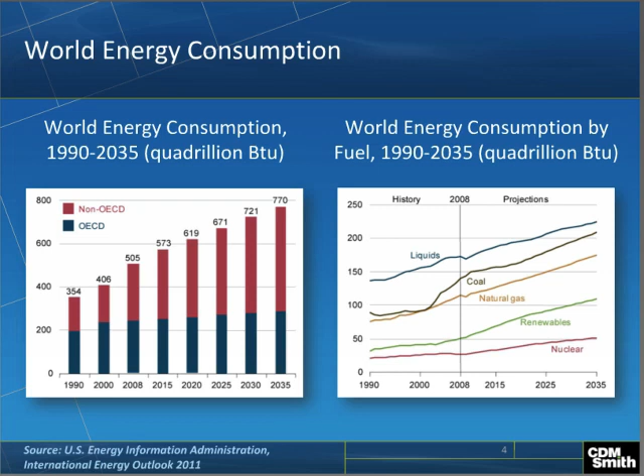What I will speak to today will be focused primarily on the new arena of shale, oil, and gas in this regard. In the United States, we utilize a great amount of energy, as I'm sure you all know.

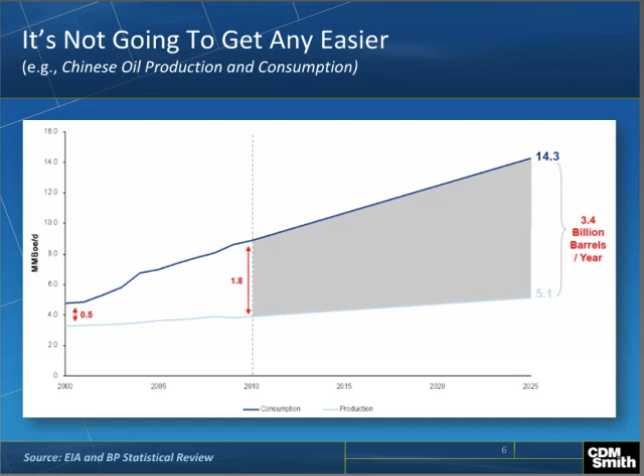And it's not going to get any easier. Here's an example graphic, China. On the right-hand side of this graphic, you see the number 14.3 - that's 14.3 million barrels of oil equivalent expected to be utilized by China in 2025. At the bottom of this graphic, you see that at that same time, they expect to produce about 5 million barrels a day. So that equates to about 3.4 billion barrels a year that China will have to import to meet its demand. And that creates even greater and greater worldwide competition for this precious and limited resource.

Now, we've had a very substantial change in the development of oil and gas here over the last few years, especially since about 2000. Traditionally, over the history of oil and gas production, most oil and gas has been captured from reservoirs underneath fields called traps. So access to oil and gas primarily over the history of production has been oriented towards finding these traps and placing wells within them to recover oil and gas. These are typically very high permeable zones that produce oil and gas fairly readily without any particular manipulation of the formation to make the oil and gas flow.

As we have used more and more oil and gas over the years, we've had to go to deeper and deeper water to find such conditions. We've had to go to far places in the earth, around the world, to find such conditions, and it's getting more and more difficult to access this kind of conventional oil and gas location.

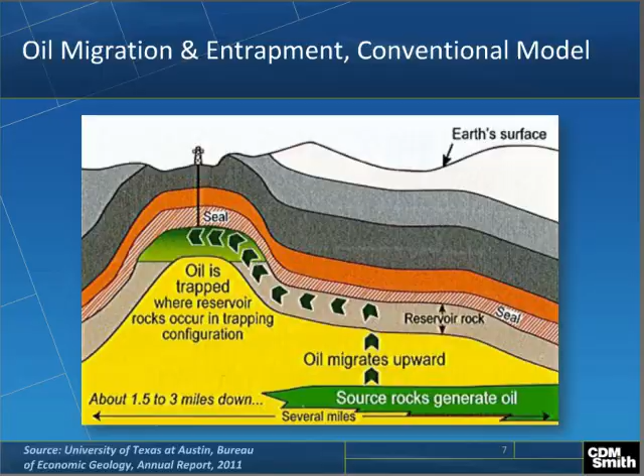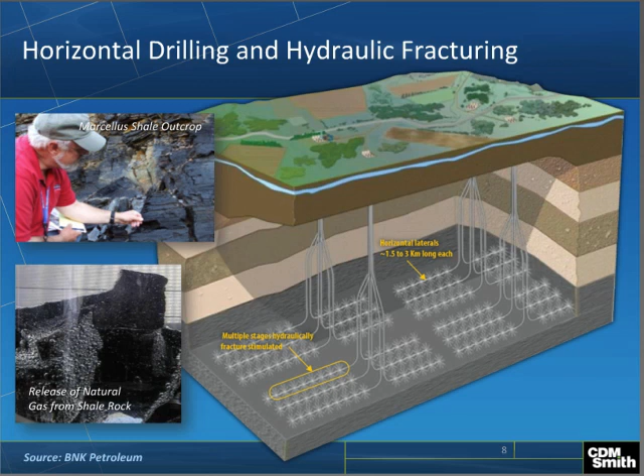Those laterals are hydraulically fractured so that surface area is created for the material to flow to the well. Other things are done too, such as adding sand or other proppants to hold those fractures open so the oil and gas can continue to flow to the well.

Fracturing has been around for a long time. It was initially started way back in the late 1800s using explosive fracturing. The first hydraulic fracturing happened in the late 1940s, and by 1988 it was common practice.

In the late 90s and early 2000s, there began to be a lot of investigation and utilization of the technology in a shale area down in the Fort Worth area in Texas called the Barnett Shale. A company called Mitchell Energy, and Devon Energy, joined forces and really developed the ability to combine horizontal drilling and hydraulic fracturing in a way that made development of gas, in the case of the Barnett, economically successful.

Since about 2006, this technology has really taken off in development of oil and gas from shales and other impermeable formations around the United States, and it's also beginning to be applied in various places around the world. So today, in 2012, 60 to 80% of all oil and gas wells are typically hydraulically fractured, somewhere in the neighborhood of 35,000 per year, and 2.5 million to date, was the last data I've seen. So you can see it's a readily utilized technology.

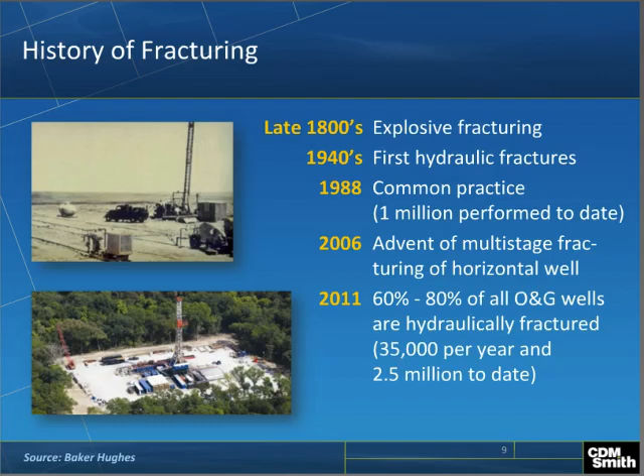The production of natural gas from shale has really taken off since about 2006, when the advent of isolated multi-stage fracture stimulation of horizontal wells was developed, again in the Barnett. Various formations around the United States began to be developed in this fashion.

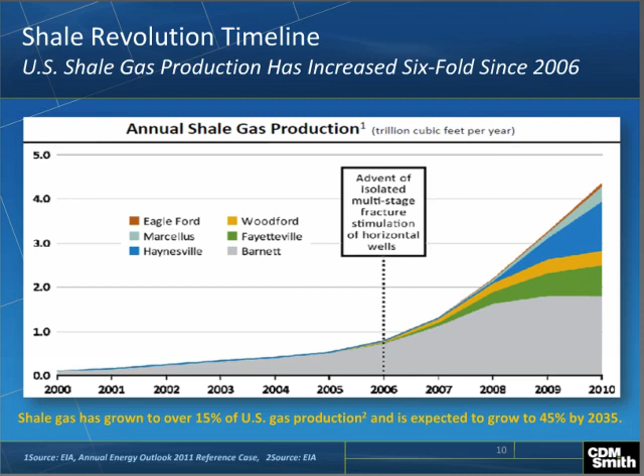You have the Barnett in gray, Fayetteville in green, and various others in different colors. Of particular note is the very major growth of development of natural gas, and of course oil as well, in these shale formations.

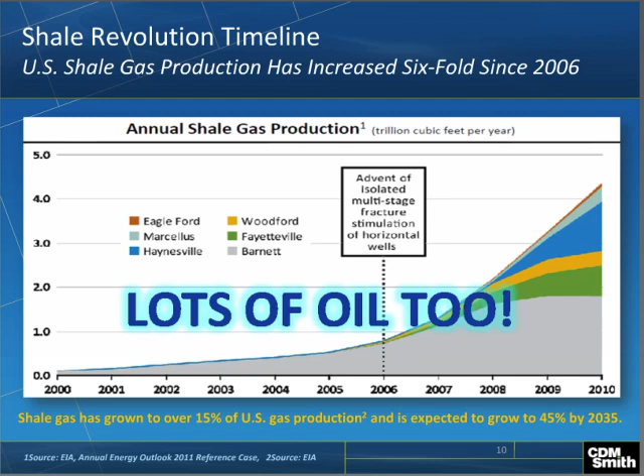There's been a tremendous amount of success, especially recently, in not only getting natural gas to flow to wells using these technologies, but a lot of oil is being developed this way too, in formations that have both gas and oil, and natural gas liquids as well.

There are quite a number of substantial unconventional shale, tight gas, and other basins throughout the United States that are being approached in this fashion.

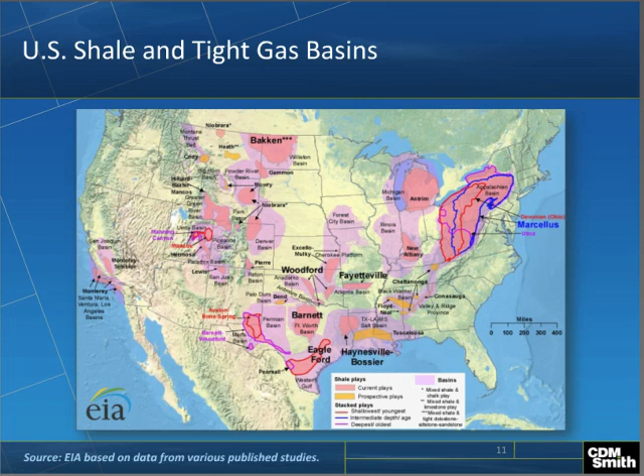Many of you have heard of the Marcellus in the Northeast. We have the Eagle Ford in Texas, and lots of areas in the Rocky Mountain West that contain a tremendous amount of natural gas and oil that is now accessible using this technology.

One of the results of this boom is that geologists are really beginning to understand and spend more time and energy evaluating truly how much of this resource is available to us from these source rocks. There's a process of developing technical reserves, estimating the reserves of oil and gas available that are technically recoverable in various formations. And as more has been learned about these shale formations, the quantity of the estimated technical reserves has really expanded tremendously just in the past few years.

So what we are faced with is the recognition of a tremendous resource available in the United States, throughout North America, and really throughout the globe, previously not available to us, which changes many aspects of energy development. We're in the midst of the very early stages of experiencing, observing, and dealing with those changes.

Currently there are a number of very significant known sources of shale around the world as well, but very little of the world has been studied, so there's much more unknown about this resource globally than is known. I think we can expect a tremendous amount of development around the world.

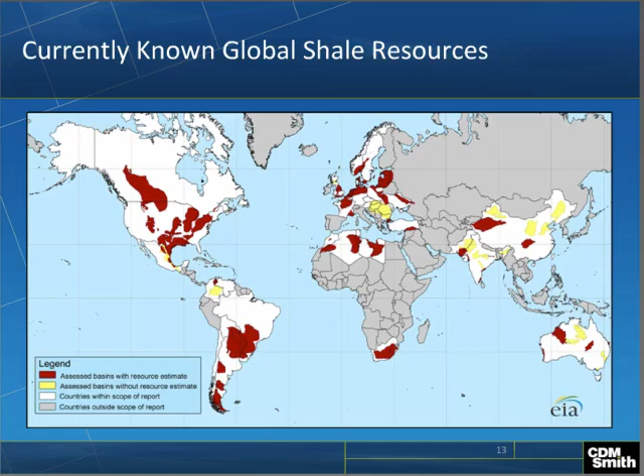So what does a trillion cubic feet of gas mean? Well, 1 trillion cubic feet of gas is enough to heat 15 million homes for a year, generate 100 billion kilowatt hours of electricity, and fuel 12 million natural gas vehicles for 1 year.

The Marcellus alone, which is an area in a portion of the Appalachian Basin in the northeast United States, is estimated to have between 50 and 500 trillion cubic feet available. So you can get a sense of the magnitude of this resource that's available to us. Recent estimates suggest that this represents a 120-year supply for the United States. And as I mentioned previously, there's a whole lot of oil and natural gas liquids being developed as well.

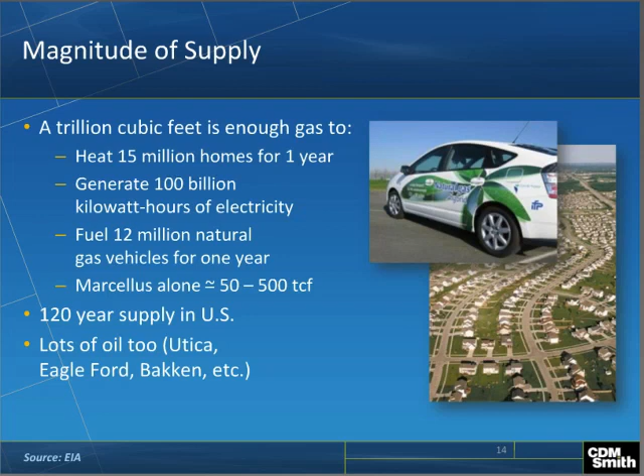Now, this brings some significant economic and geopolitical implications that are very recent and very significant. Many of you may have seen the Time magazine article, 'This Rock Could Power the World.' Interesting article that was presented in Time.

So what are some of the characteristics of natural gas? Now, you'll note that I am focusing more on natural gas than oil and natural gas liquids because of some of the very significant changes that the large quantity of available natural gas now brings to the table for us.

Well, we know we have a lot of it. It used to be considered an unreliable source, and so you didn't see much use of it in power production. In fact, there was fear of using it for power for many years because it was needed for residential heating, et cetera, and there was intent to protect residences from having to compete for natural gas with power companies.

Well, that's changed considerably. It is the cleanest combustion fuel available. It produces about half the CO2 of coal, but it does have to be managed, especially fugitive losses, because methane released directly to the atmosphere is considerably more potent than CO2 from a greenhouse gas standpoint.

It is considered a very important bridge fuel for eventual long-term transition to renewables. And it's also a very valuable leveling fuel for renewables. For example, with wind, you can't get wind power when the wind is not blowing, and with solar, you need the sun to shine to collect solar power. So during those periods when wind, solar, and other renewables are not meeting demand, natural gas is a very effective leveling fuel for that purpose.

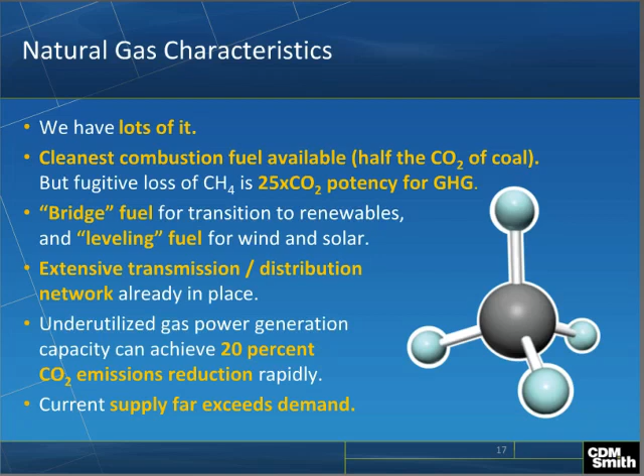A very significant point also: current supply far exceeds demand. Now that we have access to all of this gas, we have more of it than we have infrastructure that can readily utilize it in the immediate term.

Many people are recognizing the importance of it, not only oil and gas companies and many in the public, but politicians as well. For example, the White House has recognized the great value that this resource brings to our society.

The White House published a 3-point plan: developing and securing America's energy supplies, energy reduction, and innovating clean energy being key points within that plan. And there's a recognition that natural gas and oil from shale formations will play a critical role in domestic energy production in the coming decades.

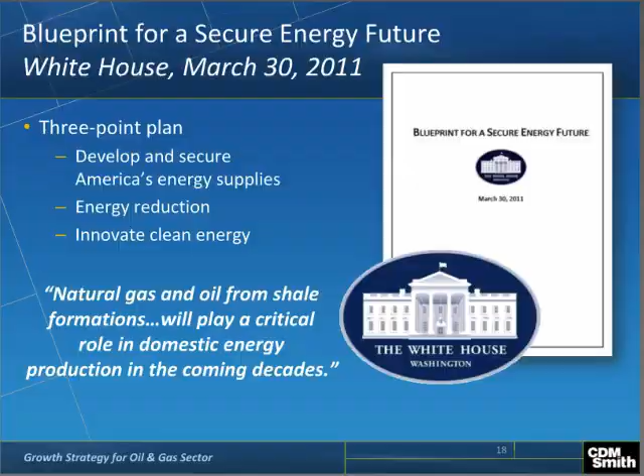Let's look at supply and demand and the meaning of this just in terms of price. A barrel of oil is north of $90 a barrel, and about a million BTU of gas is around $2.50. And these numbers, of course, change over time, but that's generally accurate today.

And 1 barrel of oil equivalent of natural gas is about 5.8 million BTU. So the price of 1 barrel of oil equivalent of natural gas is about $14.85, using these assumptions on the price of a barrel of oil and a million BTU of gas. So compare $97 to $14.85 for the same amount of energy. And what that translates to is a major economic driver for expansion of utilization of this large natural gas resource that we now have available.

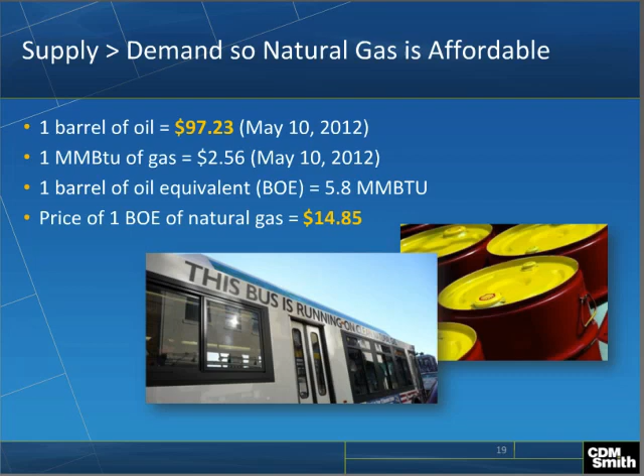And what you can expect to see is much more orientation towards natural gas-powered transportation sources and much more orientation towards natural gas power generation.

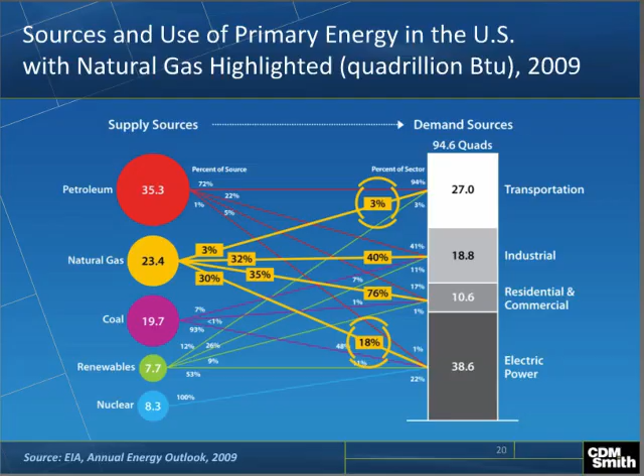And there are very substantial economic implications to this new find as well. Let's start with the U.S. reliance on foreign oil and gas, which equates to about $500 billion in wealth transfer annually. Big number, very significant if we could keep that number here in the United States.

The Barnett Shale alone, this area near Fort Worth, Texas that I mentioned, which was the first significant shale area, it's estimated that $11 billion and 111,000 jobs were annually contributed to the Dallas-Fort Worth area, plus about $275 million annually in state severance taxes. The Wall Street Journal, probably about a year ago, suggested that there had been over 600,000 jobs created to date in the shale gas arena alone.

And the U.S. chemical industry is getting a rebound from this event as well because of the source materials that shale development provides for chemical production. So it's anticipated there'll be $132 billion of U.S. economic output over a period of about 10 years, and 400,000 jobs in the chemical sector. So these are just some examples of the significance of this finding with respect to the economic influences that it can have here in the United States.

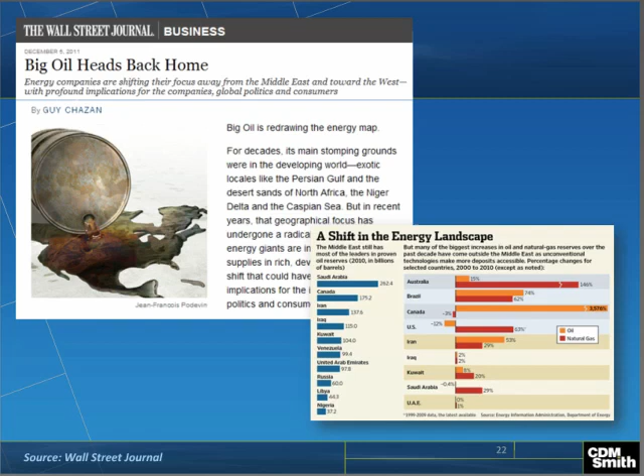And geopolitically, you also see that big oil is really focused in new areas. Previously forced to be in places that may be very dangerous and risky to develop, now they have the opportunity to focus much of their energy in development in areas that are safer and easier to address. So a big shift in oil and gas companies' orientation towards the United States, North America, and more stable parts of the world.

Well, there are environmental concerns related to any and all oil and gas development, and the new hydraulic fracturing and horizontal drilling is no different. It has environmental concerns that must be managed. And these concerns can be categorized really into two categories, surface and subsurface. From a surface standpoint, air emissions, water resources and quality, land impacts, drilling locations, infrastructure, truck traffic, lots of truck traffic, things of this nature.

From a subsurface standpoint, protecting underground water resources is a very important matter, and some implication of seismic events that can be triggered with respect to disposal activities of liquids underground. And this is an area that's receiving some interest. I encourage anyone who wants to look at that any further to access the USGS, the United States Geological Survey. They're engaged in studying this. In fact, there is a presentation available on the Academy's website by Dr. William Ellsworth, who gave a presentation at an Academy function several months ago on seismic events.

And in essence, the USGS represents that there may be some relationship to some degree, although that risk appears to be very low and manageable. But I think it's an interesting area of concern, and people should continue to study it and understand it.

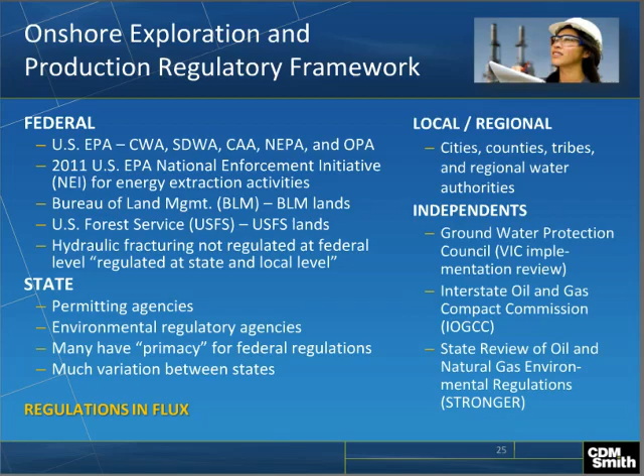And because of this very rapid change and development in this arena, there is a lot of interest and a lot of focus in the regulatory arena. And there's quite a bit of development. There's a lot of flux occurring in the regulatory arena, and a number of very significant studies going on, such as EPA's hydraulic fracturing study, which is in progress right now.

Now, one of the significant aspects of hydraulic fracturing, of course, is water use and the potential environmental impacts that might bring. Frack water utilized is typically somewhere between 2 and 6 million gallons per well. There are additional components that are added to the water to make the fracture behave the way that the operator needs it to behave. And then there's what's called flowback. When a well has been fractured, much of the water that was pumped down to do the fracturing is returned and pumped out of the well, and that has to be handled as well.

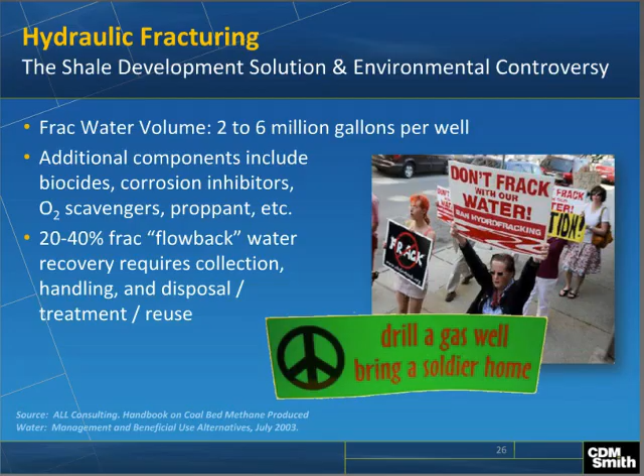The water is a very, very significant aspect of successful development of unconventional oil and gas. One has to find it, transport it, store it, treat it, lots of reuse, there's disposal required of it, much effort required for protection of it, and that's both surface and groundwater.

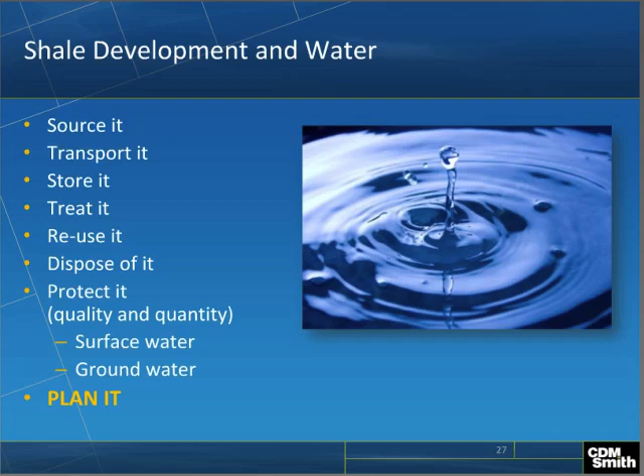And all of this means that there needs to be very effective and thoughtful planning around the water cycle in oil and gas development, especially in the unconventional shale arena. And that planning really exists for both oil and gas companies, regulators, and the public that is in the location where much of this development is occurring.

Now, we should understand the implications of shale in terms of water use and how that compares with other major water uses. And in reality, even in areas that are receiving a great deal of development, the overall usage of water is relatively low compared to other major uses such as mining, public water systems, other industrial and power generation.

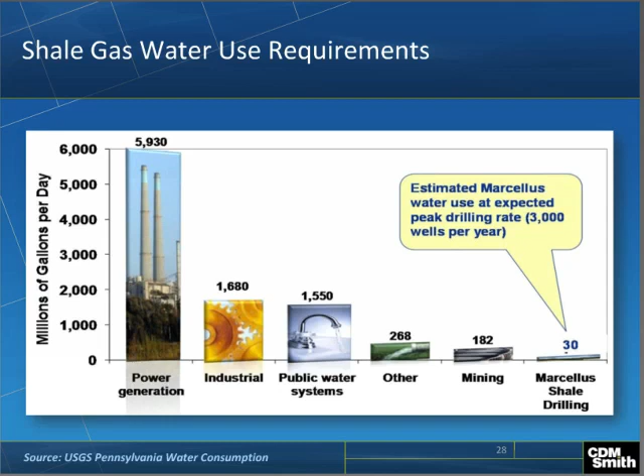But it still creates an added stress, and in some areas, for example, drought-stricken zones like South Texas, or other areas that are in highly sensitive environmental conditions with the ecology and public protection concerns, it's still a meaningful use of water that needs to be managed, but it needs to be managed with the proper context of quantity.

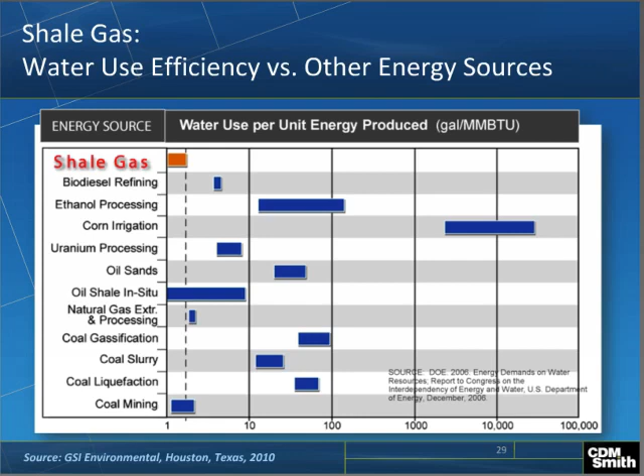And it also needs to be understood from the standpoint of, well, how much water does it take to produce shale oil and gas versus other forms of energy production. And in reality, it's a relatively small water footprint compared to many other sources of energy production. And that should be understood as well.

So for protection of water quality, there really are three primary areas of concern and attention. Number one is surface activity. You have spills, you can have dikes that breach, and all of these things require ongoing attention. And a lot of attention is being given to the management of surface activities for that reason.

You have folks that are concerned about release of fracturing fluid to drinking water aquifers. Most people in the know who really understand the technology consider it a minimal or even non-existent risk. We'll have some other speakers today that can speak to this in a little bit more detail about why that is. But it's still a concern that the public has quite a bit of focus on, and EPA's hydraulic fracturing study is, of course, spending a good bit of time on that matter as well. But it's important to separate the science from the fear in that regard. And there's a lot of attention and emphasis on that matter.

And then, of course, there's well completion. A well has to be properly completed to protect various zones, drinking water zones being one. And the next speaker will spend considerable time on that matter.

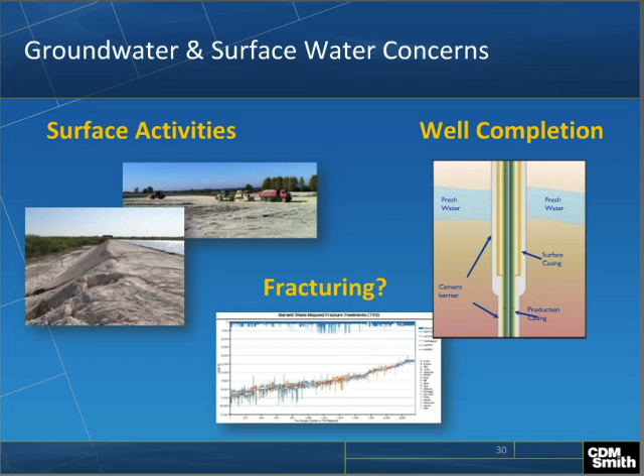Now let's just talk about energy choices overall. The sources of the world's energy are basically distributed in the following way. Oil is over 33%, coal is at almost 27%, natural gas at about 21%, renewables a little over 10%, et cetera, nuclear and others included.

There's a nice quote by Klaus Lackner. There are very few energy resources large enough to cope with modern global energy demand. Any technology able to satisfy these demands will unavoidably interfere with natural dynamic systems, which must be mitigated. A scenario in which available energy resources fail to provide a basis for the energy infrastructure will be a scenario with drastic reductions in economic output and one in which living standards will fall back to much lower levels.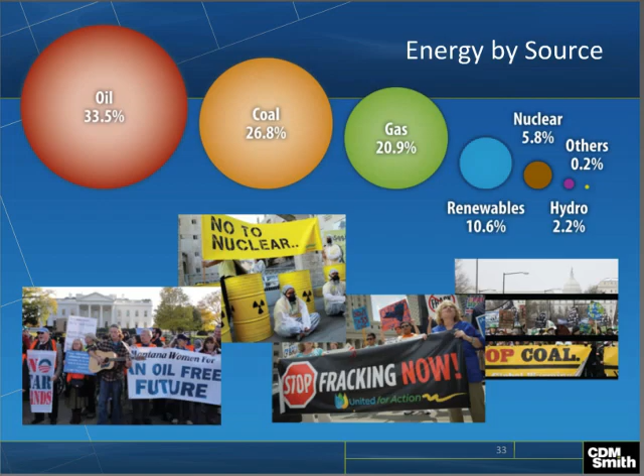And so from my perspective as an environmental engineer, what we're faced with is the need to accomplish environmentally sound shale development. And there are lots of influencing factors to doing this, but primarily four in my mind. There's the oil and gas companies who have the expertise to acquire access to oil and gas, but limited water expertise.

We have the community that needs the energy. We need the jobs. We have environmental concerns that need to be addressed. And generally speaking, the community doesn't have the technical expertise to really understand a great amount of the details that are important.

We have the engineering and science community, which we may not be oil and gas developers, but we know a lot about water management. We know a lot about environmental management. So we're bringing our skills to the table to help accomplish this.

And then you have the regulators. Regulators faced with a huge increase in demand as a result of this development activity, having to respond to that. They have responsibility to respond to that. It's a new challenge, and they have stretched resources. So all of these factors come together and represent the challenge that we have as a society, and that is to access our energy resources and do so in an environmentally sound way.

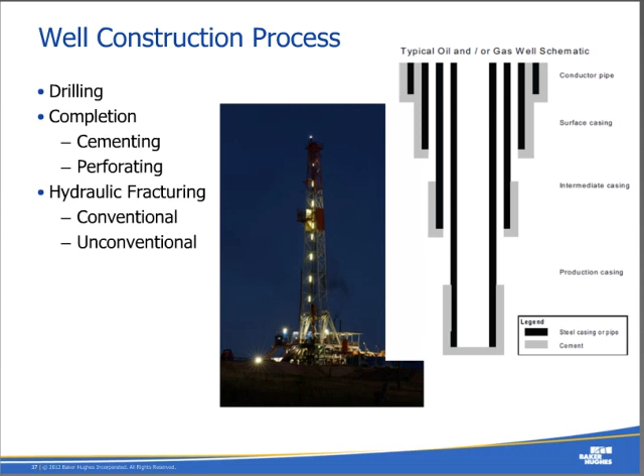So what I'll talk to you about today is the drilling process, the completion process, including how we cement a well, and also how we perforate a well so that we can allow the hydrocarbons to flow. And then I'll go through the hydraulic fracturing process in conventional wells that have been around, as Hunter mentioned, since the 1940s and a very well-established practice since the 50s at least, and touch on horizontal drilling, which is one of the enabling technologies that has allowed shale to really come into play, and tell you really what the differences are between conventional and unconventional.

If we move on into the drilling process, there are wells drilled in the United States today that go up to 35,000 feet in depth, and that's just straight vertical depth. When you look at the typical wells that we do in shale reservoirs, oftentimes they can be 10,000 feet deep, but they can also have a lateral horizontal section that's 10,000 feet out. So when you're trying to reach that from surface, you're actually going 20,000 feet, although it's 10,000 down and 10,000 out.

There were almost 65,000 new wells drilled in the U.S. in 2011, and that was done with basically 1,900 rigs. If you do a little math on that, you see that a typical well, an average well in U.S. land, takes anywhere between a week and a half to 2 weeks to drill. It's a relatively quick process, actually, when you consider the depths we're going. The U.S.-based rig count right now for this past month in August was 1,914 active rigs working.

And if you look at the breakdown, we had roughly 25% of those drilling directly for gas reservoirs and 75% drilling for oil reservoirs. And the reason why I mention that, if you look back at statistics from a year ago, those numbers were basically the opposite. Everybody was drilling for gas. But because we have had significant success in bringing gas to market in the United States, the price of gas has fallen drastically. And Hunter touched on those numbers and the differences between the price of a barrel of oil and the price of a barrel of oil equivalent of gas. And basically, right now, the driver for most companies is to try and produce oil as it is more lucrative.

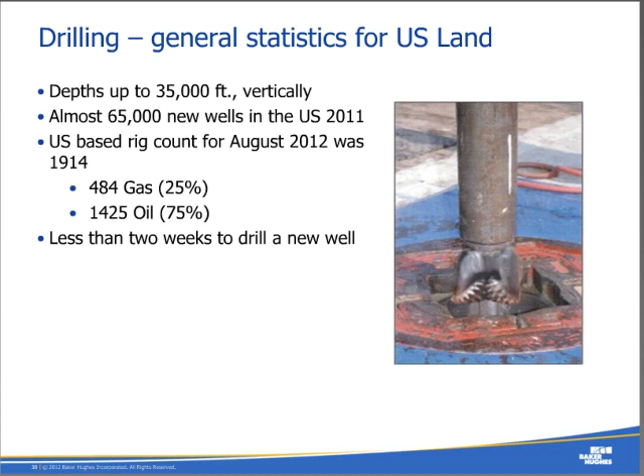Most of the companies we speak about are not privately held, and they're not done just for the greater gain of the world, but for absolute profit. So oil is more profitable to go for at the moment, and you see that very quickly in the numbers.

If we move to the next slide, we'll see how we actually get to the oil and gas. What does the drilling process look like? I point out the rig here is the small thing at the top. We have a drilling rig, which actually, much like an electric power drill in your house, provides rotational torque and actually drills a hole.

It controls the downward force of the bit. When we're talking about getting to these depths, the rig controls the weight of the full string that goes into the hole. When you're talking about vertical drilling, it actually provides the rotational torque necessary to turn a full drill string and do the drilling process.

It actually cuts into the rock, into the ground in the formation that's there, and delivers that back to surface. And when I say deliver that back to surface, obviously when you make a hole in the ground, you create cuttings that have to be removed from the hole. That's done by a process of circulating drilling mud, which is a fluid we'll talk about in detail in a few minutes.

So when we get to the point of talking about horizontal drilling, there are several techniques that have come into play that really have enabled us to exercise our ability to get at these shale wells. One of those is measurement while drilling.

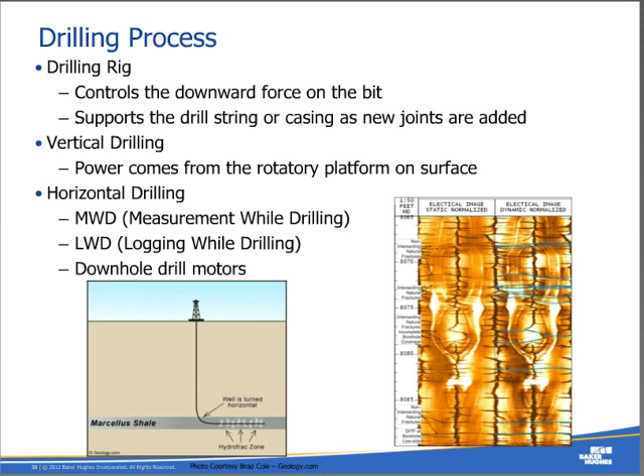So it's quite an enabling technology to make sure that we're producing the right thing.

I previously mentioned muds, drilling fluids. Basically, these are circulated down the drill stem and back up the outside, the annulus. They create a jet down at the bit that helps cut into the formation, remove the cuttings from the ground you've dug up, and also lubricate the bit and control the stability of the borehole.

If you think about it, if you just go out in your backyard and start digging a hole, you can only get so deep before it starts to cave in on you. One of the major functions of drilling fluid is to create a hydrostatic head and pressure that enables you to have some borehole stability.

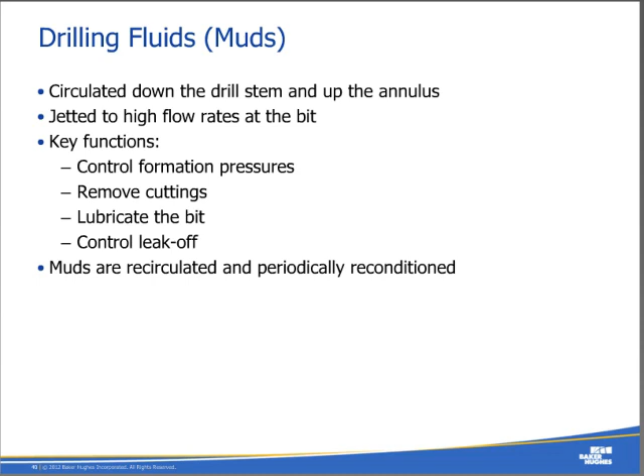These muds are recirculated and used over and over again, so it's not like they flow out of the well and are disposed of. They're actually created with barite and some other natural chemicals in most scenarios, and they're used over and over again.

We also go into a lengthy discussion of cementing, and Hunter touched on the fact that surface and groundwater are some of the areas where we absolutely must make sure we're protecting the environment. Cement is one of the main low-tech tools we use to do that, and it provides a permanent bond between the casing that we put in the ground and the formation.

We'll talk about that on the next slide. I'll show you some pictures of exactly what I mean between casing and formation. And it provides some stability and isolates between the zones.

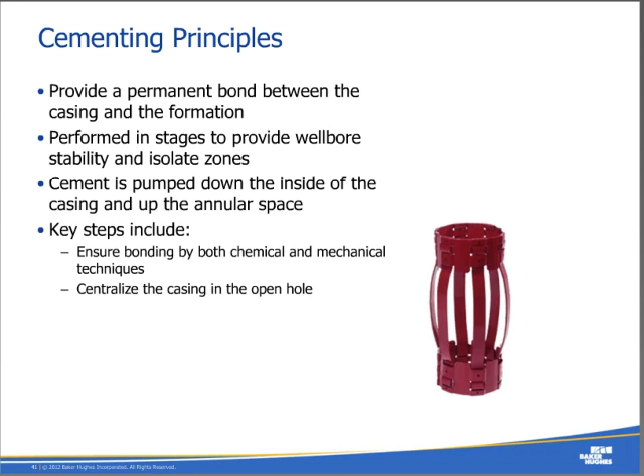Cement is actually pumped directly from the surface. It goes down the inside of the pipe and back up the outside, so you get it into position where it can isolate the actual formations from the surface.

If we look next, there are quite a few tools that we use. This stuff is not just Sakrete. It's not the kind of stuff you would go down to Home Depot and buy and mix up and pump down an oil well.

It's very well engineered. There are a lot of quality controls that are done prior to placing the cement, during the placement process, as well as after placement, to ensure that we're actually creating the right type of integrity that we expect.

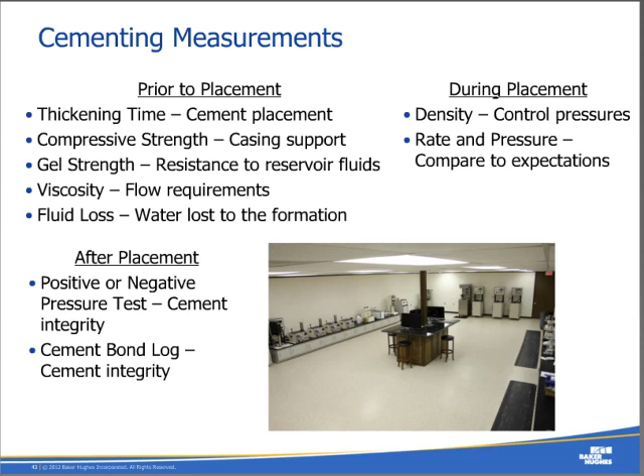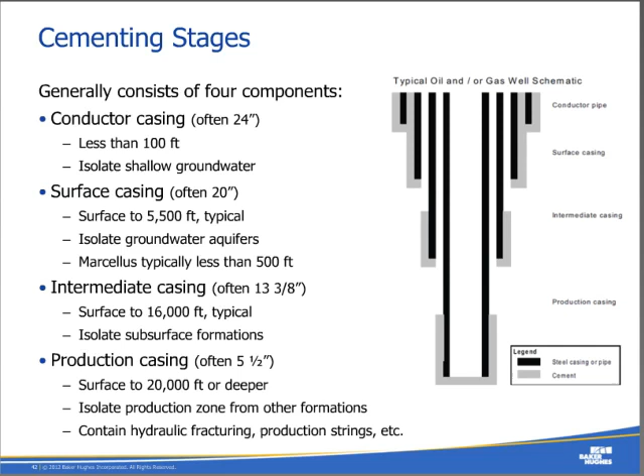Now, if we return to the next scenario: we've put this string of metal pipe into the ground, gotten it to our hydrocarbon producing zone, and fully cemented it in place so it's completely sealed and nothing can get in or out. Now we want to turn it into something that can produce oil and gas. The way we do that is we actually have to poke holes in this perfectly pristine environment we've just created, and we do that in a couple of different ways.

One way is explosive perforating. We run in a charge of shaped charges, like you'd see in demolition for buildings or other deconstruction projects, but specifically tailored to this industry. This blows holes directly through the pipe, and once that's in place, it allows the hydrocarbons to flow in.

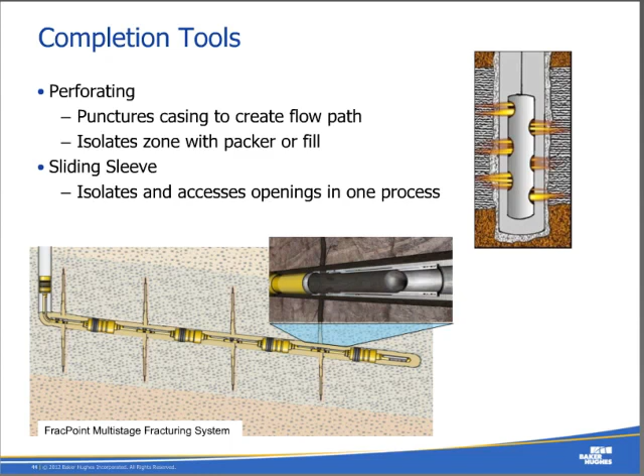Another approach is the use of multi-stage fracturing systems, where we put in a set of sleeves that already have ports in them before they're installed, so you don't have to blow a hole in your perfectly pristine pipe. That's the completion tool scenario.

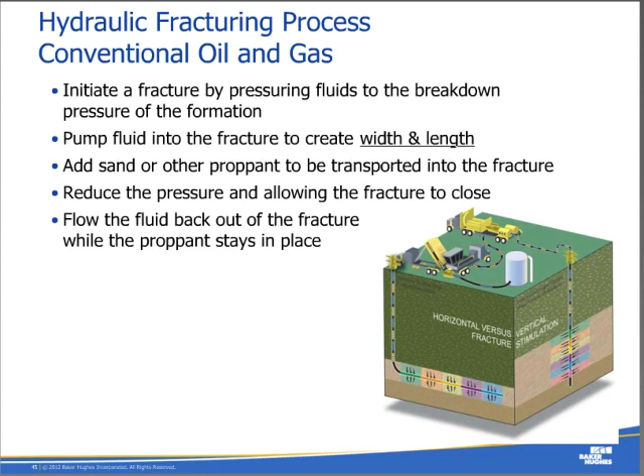Once the completion is in place, we need to get to the point of hydraulically fracturing. In conventional oil and gas wells, this was done not so much to force a well to produce, but to create a better producing well than one that wasn't fractured. So you're basically pumping fluid into the wellbore to create cracks, and the more you pump, the greater the width or length of the crack created. Then you pump sand along with the fluid so the crack stays held open while production takes place. A lot of the fluid flows back out of that fracture once it's in place, so you need a very engineered fluid to make all of this happen.

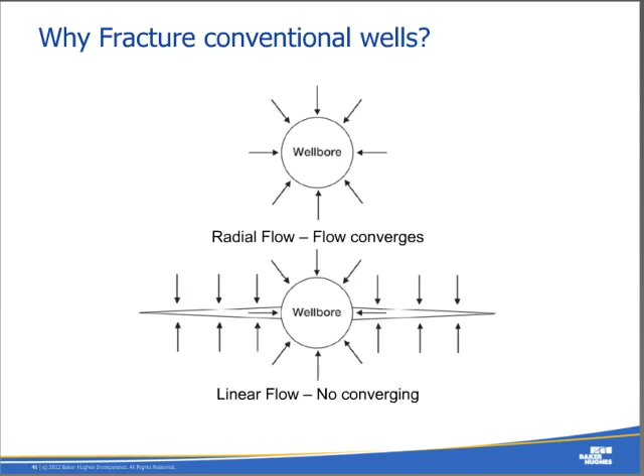When we talk about why we actually fracture conventional wells, think about a wellbore with radial flow — all the flow converges, and it's very difficult to produce because of that converging effect, which chokes back the flow. When you fracture a well, it creates a linear flow path, so there's no convergence.

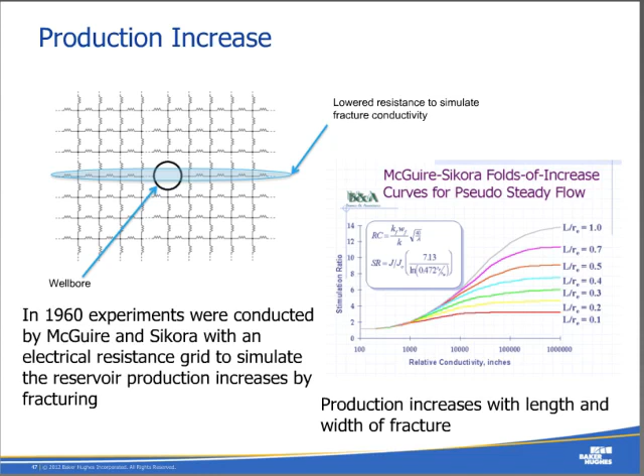Back in the 60s, there were some interesting experiments done to try and quantify what fracturing a well actually means. McGuire and Sikora did simulations with electrical resistance that showed the further out you go with a fracture to lower the resistance, the more production you'll get over time. So the length and width of the fracture were the key factors — the saving graces, really — in how you increase production from a well.

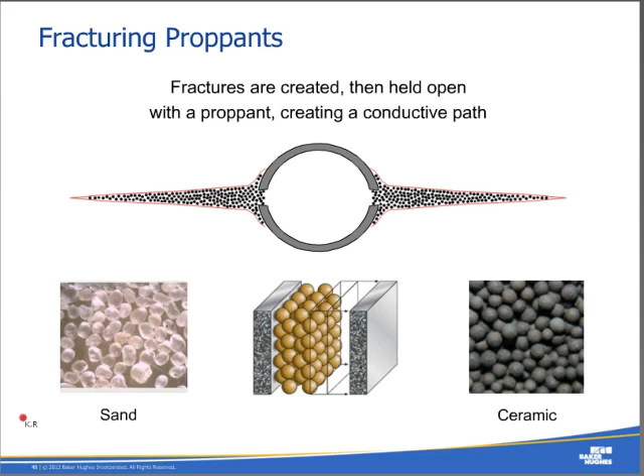I mentioned proppants before — this is basically sand in most cases, but it can also be ceramic beads. Their function is this: we create a fracture with a certain width, but as soon as we release the pressure, the fracture tries to close back on itself and seal off. So we put sand in place to enable the oil and gas to flow back out of the fracture. That's the basics. From a fracture mechanics standpoint, the first thing you do in fracturing a well is pressure up to the point where you exceed the breakdown pressure and start to create a crack.

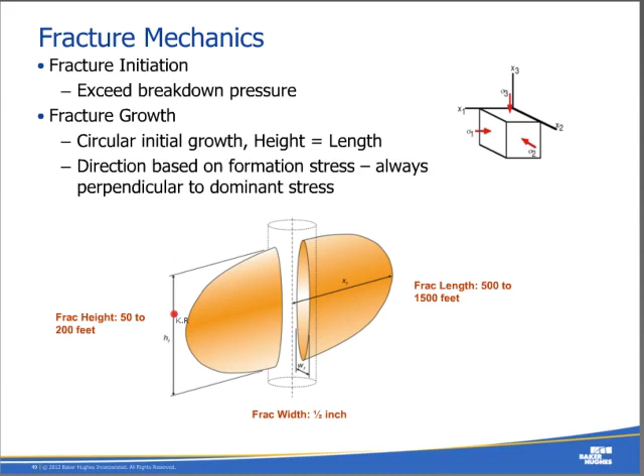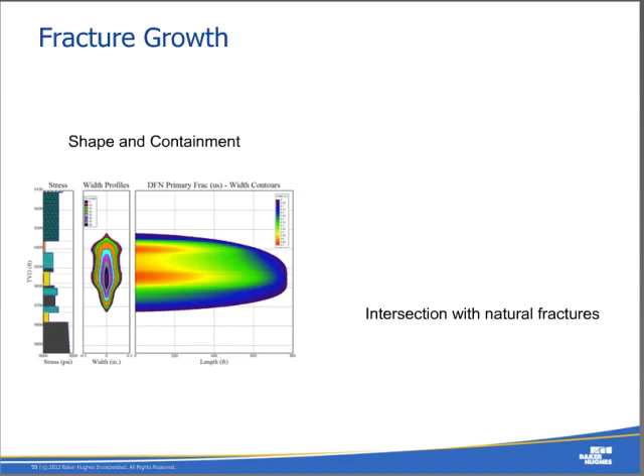If you look at fracture growth, we can fairly well tell what the shape of a fracture will look like before we ever make it. I mentioned the logging while drilling tools that give us data from the well. One of the things it gives us is this stress environment. So we know, as Hunter mentioned, that this zone is seal rock. When we create a fracture here, it'll only grow to a certain height before it runs into a higher stress zone of rock, and the easiest way for it to grow is out instead of up. This is something we use to predict where the fractures go.

I mentioned before that the fluid properties in hydraulic fracturing are used to create low pump friction, so you don't need as much hydraulic horsepower at surface. We need to create fracture width with low to high viscosity fluids and transport the proppant into place. But after the proppant is in place, we need a fluid that returns to more or less water consistency, so that it doesn't wash the proppant back out of the well.

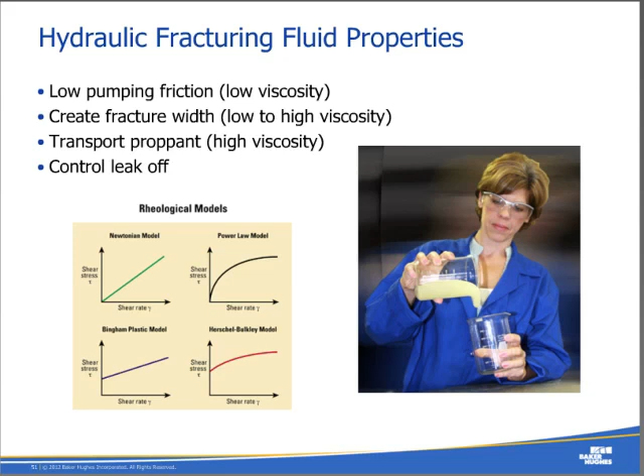We've talked mostly about conventional wells now, and I'll move into unconventional as I get to my closing. Unconventional is where we deem shale and tight gas. In conventional wells, you can think of the formation as basically a sandstone—like a sandstone coaster—where the permeability and porosity are such that it soaks up water easily, and lets go of fluid pretty easily too. In conventional wells, we fracture simply to increase production; it's just a stimulation technique, not a requirement.

In tight gas wells, the formation is almost like brick or concrete—there's not a whole lot of fluid flowing in or out; it's very difficult to flow. The unconventional is closer to granite and shale, and you absolutely have to have fracturing for it to flow at all. As Hunter mentioned, this is the source rock, and it just doesn't contain the type of volume, porosity, or permeability that allows the hydrocarbons to flow.

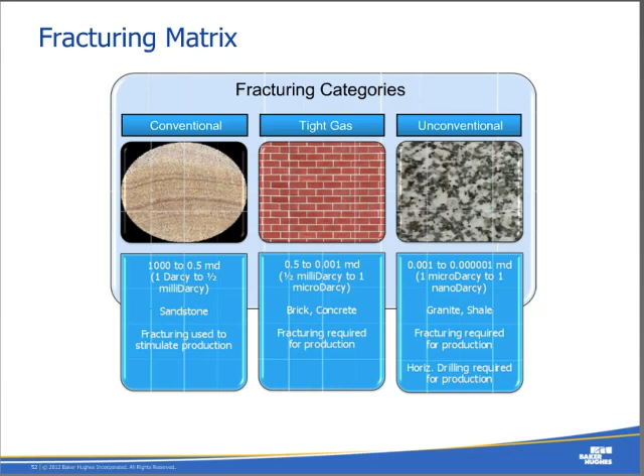If you look at shale, what is it? Hunter showed an outcropping as well. It's mudstone, siltstone, shalestone—the source rock—with very fine grain size and extremely low permeability. The natural gas and oil actually sit within the natural fractures in the shale, and it's adsorbed on the surface. It's not like a big pool you can just tap into.

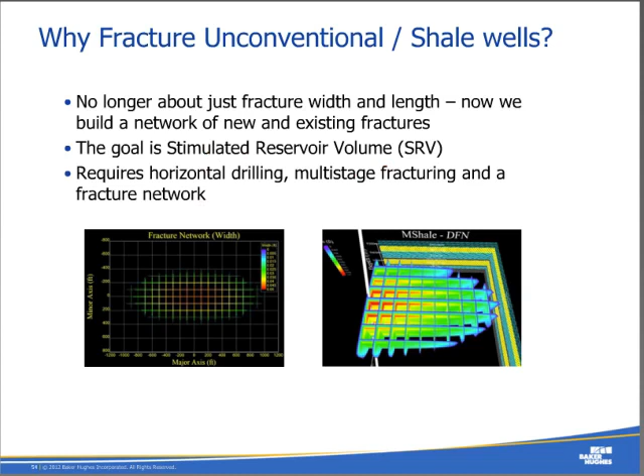So that changes the whole method we talked about of just creating a bigger crack. What you actually have to create in unconventional wells is a fracture network, and that's why you get multiple wells and multiple stages. As you can see here, these are some visualizations to show what we're trying to create downhole to get stimulated reservoir volume. As we get further into this, operators are upping their number of stages, upping the number of fractures, and getting their wells closer and closer together.

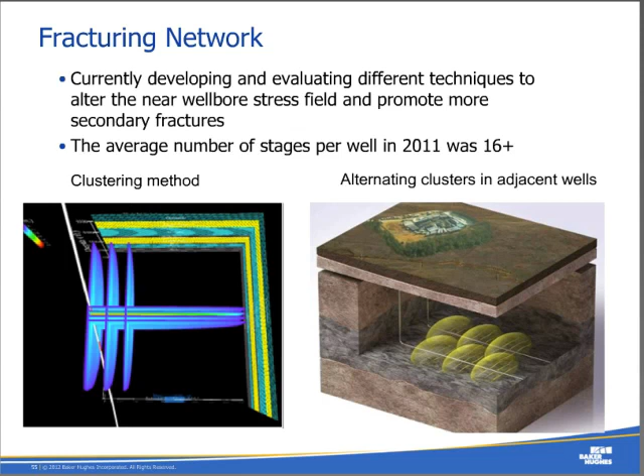Since 2006, there's been basically a doubling of fracturing stages every 18 months. When we originally started, wells averaged about 8 stages per well; last year they'd gotten up to 16 plus, and now we're currently doing wells with up to 40 stages of fracturing each. So the returns are such that it makes sense for the operator to stimulate more volume with fewer wells.

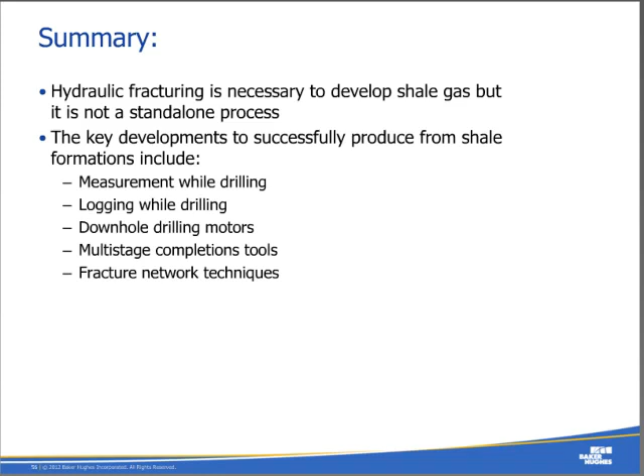In summary, hydraulic fracturing is absolutely necessary to develop the shale gas resources we have, but it's not a standalone process. The key developments required to successfully produce from shales are measuring while drilling, logging while drilling, downhole drilling motors, multi-stage completion tools, and also ways of projecting fracture networks.

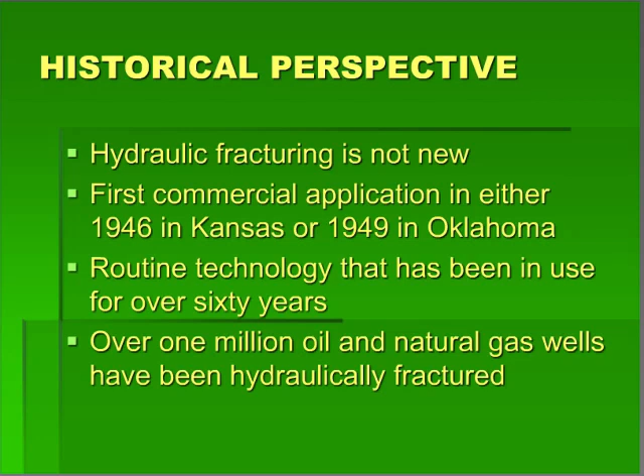Hydraulic fracturing is not something new. It has been around, I think Hunter had said, since the 1940s. There's kind of an argument between Kansas and Oklahoma who had the first hydraulic frac job—Kansas saying 1946, Oklahoma 1949. It's pretty much a routine technology, as both Hunter and Kevin explained, for over 60 years. We have over 1 million oil and gas wells in the United States that have been hydraulically fractured.

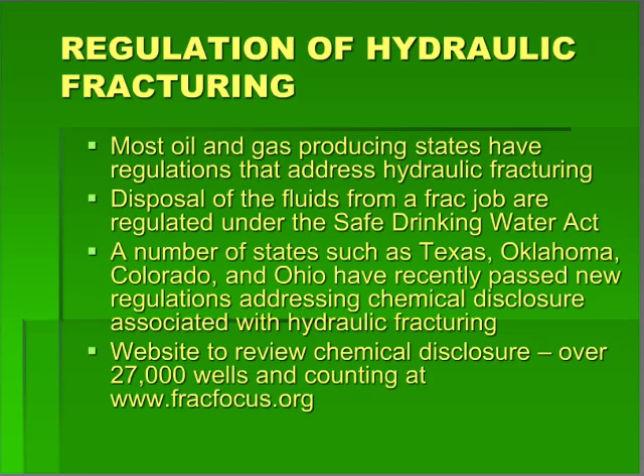Most oil and gas producing states have regulations addressing hydraulic fracturing. The disposal of the fluids from the frac job is regulated under the Safe Drinking Water Act. A number of states, such as Texas, Oklahoma, Colorado, and Ohio, have recently passed new regulations addressing chemical disclosures associated with the chemicals used in the hydraulic fracturing process. A website developed to view chemical disclosure, currently counting over 27,000 wells, can be accessed at www.fracfocus.org, designed by the Groundwater Protection Council.

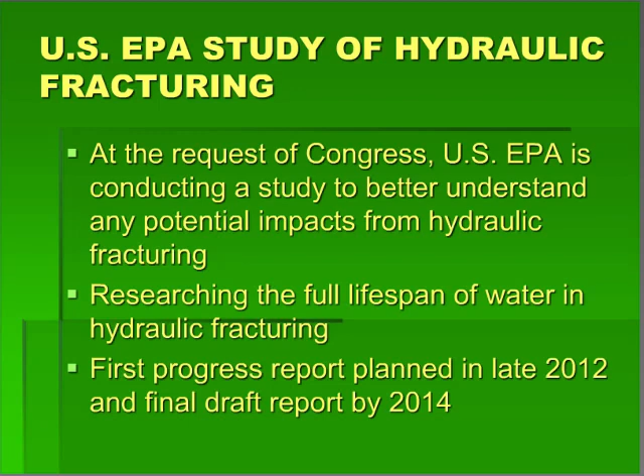Just to touch briefly on the U.S. EPA study on hydraulic fracturing: at the request of Congress, U.S. EPA was challenged to conduct a study to better understand any potential impacts from hydraulic fracturing. The research covers the full lifespan of the water, from usage through the hydraulic fracturing stage to ultimate disposal. The first progress report is planned to be released within the next couple months, and a final draft report by U.S. EPA will be released in 2014.

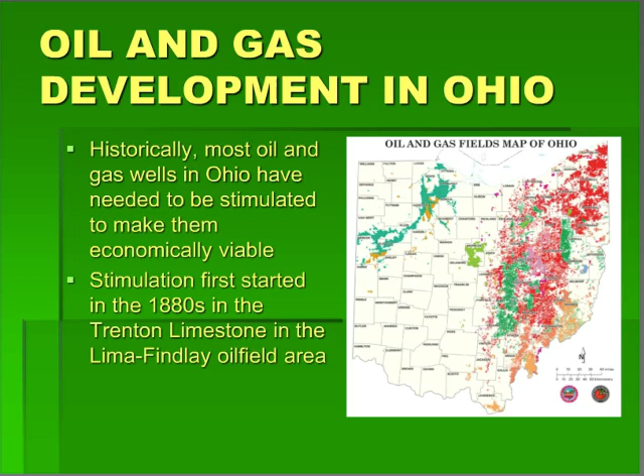Now I'll briefly touch on some aspects of Ohio's oil and gas development and hydraulic fracturing. Ohio has been an oil and gas producing state since 1860. Most of the oil and gas wells in Ohio have required some type of stimulation to make them economically viable. As Kevin showed on some of the slides, a lot of our formations are tight formations that require stimulation. Some of the first stimulation started in the 1880s in what we call the Trenton limestone in the Lima-Findlay oil field area, in the upper left-hand part of the state.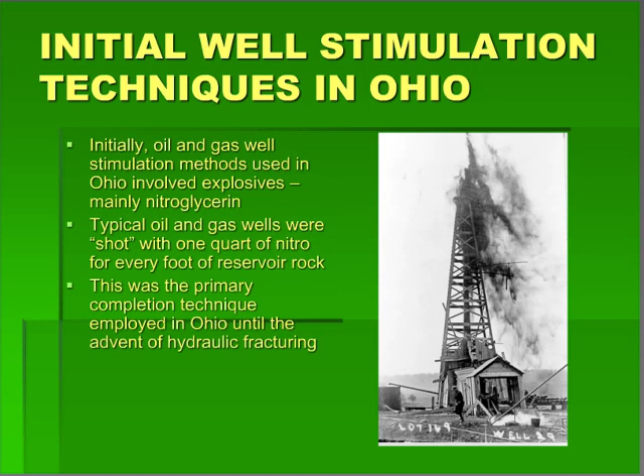Initial well stimulation techniques in Ohio: most wells historically were stimulated by explosives using nitroglycerin—that's what they called shooting the well. Typically we would see 1 quart of nitroglycerin used for every foot of reservoir rock to stimulate it. This was the primary completion technique employed in Ohio and many other states until the advent of hydraulic fracturing.

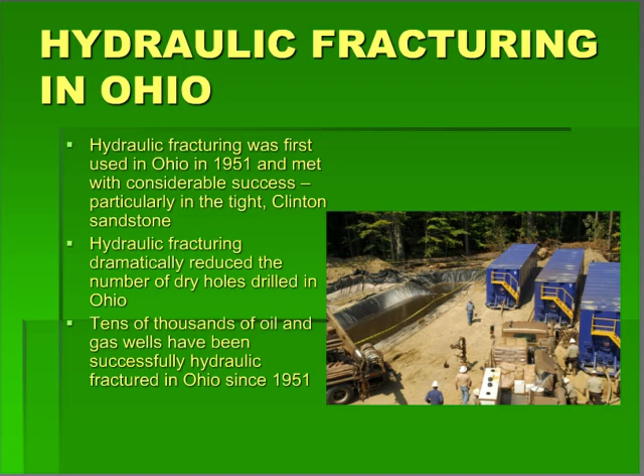Hydraulic fracturing in Ohio was first used in the East Canton field in 1951, and met with considerable success, particularly in the tight Clinton Sandstone Formation. Hydraulic fracturing since that time dramatically reduced the number of dry holes being drilled for oil and gas in Ohio. Tens of thousands of oil and gas wells have been successfully hydraulically fractured in Ohio since 1951, and we currently have about 64,000 producing oil and gas wells in Ohio, about 95% of those stimulated by hydraulic fracturing.

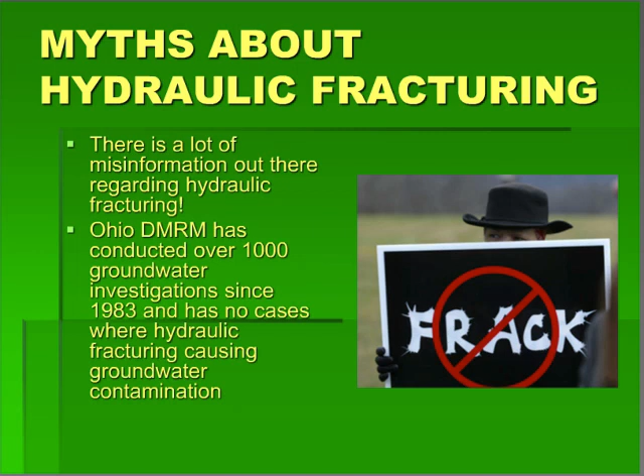There's obviously a lot of misinformation being put out regarding hydraulic fracturing. One of the things we did in a study here in Ohio is conduct over 1,000 groundwater investigations since 1983. We went back through those investigations, and there were no cases where hydraulic fracturing had caused groundwater contamination.

What happens is at depth, as Kevin demonstrated, you create a vertical fracture, but if that fracture extended and continued upwards well beyond your zone and was approaching close to where the freshwater aquifers are, at a depth of about 1,000 to 1,200 feet, that fracture would obviously start turning and going sideways. What happens at those shallow depths of 1,000 to 1,200 feet is you're physically able to lift the overburden of rock. So consequently, your fracture would go horizontal and would not continue to move vertically up into the groundwater and cause contamination.

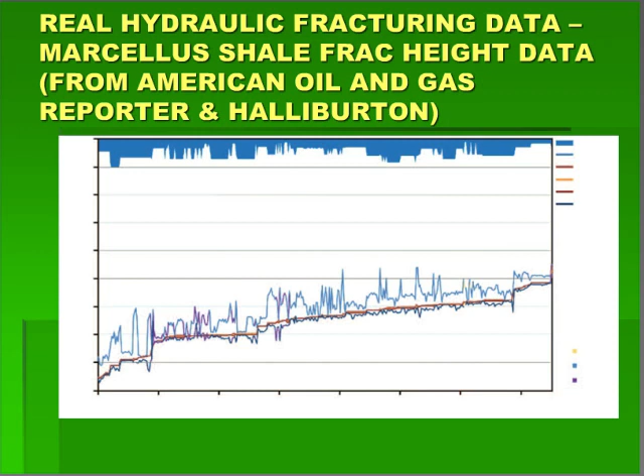Now, the potential contamination avenues for a hydraulic fracturing job would be through improperly plugged old oil and gas wells that could possibly be intercepted during a hydraulic fracturing treatment. But what we've seen in Ohio, and I believe it'll be the same in most of the other oil and gas producing states, is your number one groundwater contamination source is going to be surface contamination. Spills, equipment failure, pit leakage is obviously a big avenue for potential contamination.

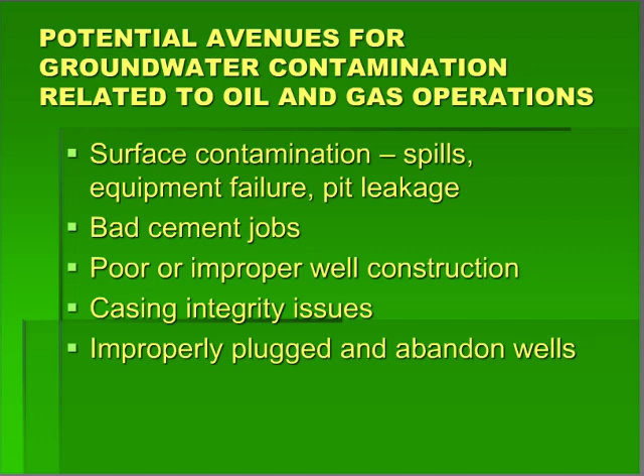Bad cement jobs is also a possible way to have groundwater contamination or contamination from fugitive or stray natural gas. Poor and improper well construction, casing integrity issues, and then improperly plugged or abandoned wells can also be a potential avenue for groundwater contamination.

Regulatory reform has really helped, and I think if you examine most of the oil-producing states, we have continued to pass new regulations through the years that have dramatically reduced the actual number of contamination cases related to oil and gas activities. This is just a graph showing Ohio's study of the over 1,000 groundwater investigations that we conducted, and what it shows is as we've passed new key regulatory reforms, we have continued to reduce actual contamination cases related to oil and gas operations.

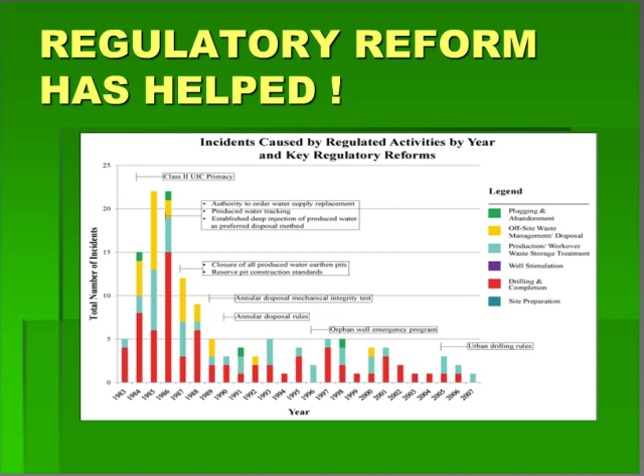So that is one of the key things I think you continue to see in most of the oil and gas producing states: continued passage of new regulatory reforms to continue to dramatically reduce actual groundwater contamination cases related to oil and gas operations.

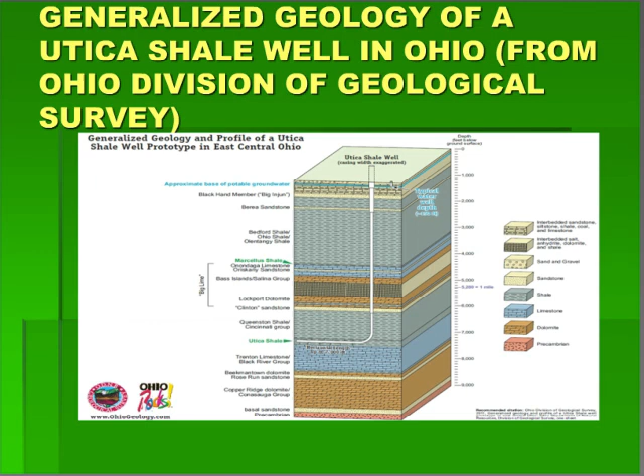Here's just a generalized schematic of a current Utica Shale well being drilled in Ohio. As Kevin touched on with some of his diagrams, you can see how the well is constructed, typically with at least 4 layers of steel casing protection with cement. The groundwater is isolated through what we call the surface casing. And in Ohio and most states, we protect what's called the deepest underground source of drinking water, the USDW. Most states like Ohio protect down to 10,000 milligrams per liter total dissolved solids. So we are protecting the groundwater well below what's currently used for human consumption, because one day that brackish fluid may be needed for human use.

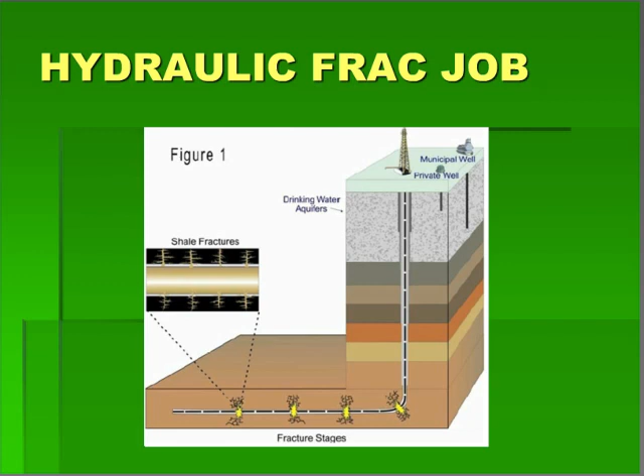Here again is just a small cartoon. Kevin touched on a hydraulic fracturing job in a lot more detail than I did. And you can see again how the well is stimulated and how the fractures are completed. One thing I did want to touch on is that hydraulic fracturing and horizontal drilling are a merger of 2 existing technologies. As you saw, hydraulic fracturing has been ongoing for well over 60 years. Horizontal drilling has been used fairly widely in the United States for the last 20 to 25 years. So it's not something really new. It's a merger of 2 existing technologies that has created this opportunity for the development of these unconventional shale resources.

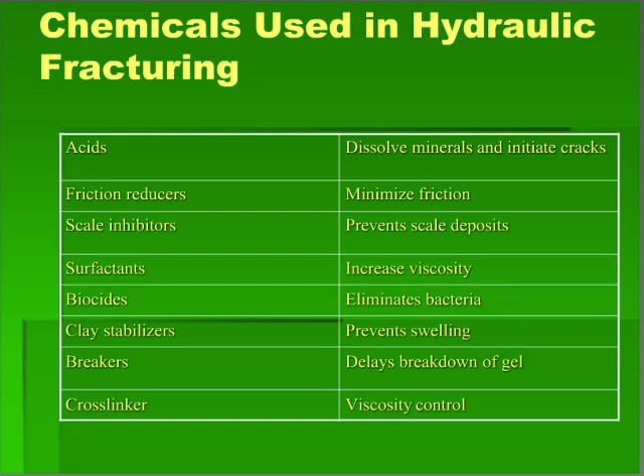The chemicals used in hydraulic fracturing: we use acids, friction reducers, scale inhibitors, surfactants, biocides, clay stabilizers, breakers, cross-linkers. And basically all this is to help with the process. The acids help dissolve the minerals. The friction reducers minimize the friction as you're pumping the fluids away. The scale inhibitors prevent the development of scale deposits. Surfactants, which are normally in shampoos, help increase the viscosity of the fluid. The biocides kill any bacteria that may be harmful in preventing flow of oil and gas in the well. Clay stabilizers prevent swelling of the clays. And the breaker and the cross-linker also help with these types of fracturing jobs.

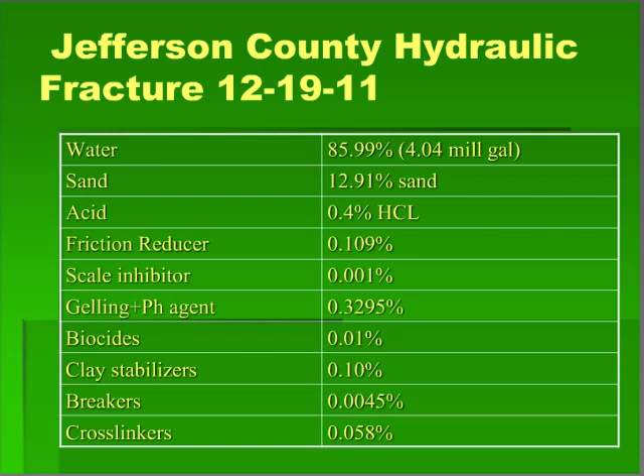Here's just an example of a real-life hydraulic fracturing job that was performed in Jefferson County, Ohio, back last December. As you can see, the vast majority, over 98% of a hydraulic fracturing job is predominantly water and sand. And the remaining chemicals make up less than about 1 to 2% of a hydraulic frac job. So you're looking at maybe a 6 to 8 million gallon hydraulic fracturing job, and 98% of that fluid or more is water and sand.

There's a group called STRONGER that does reviews of state oil and gas programs, and they conducted a review of Ohio's hydraulic fracturing program in January of 2011, and that report was released and is available on our website. In summary, that report, from a committee of industry, regulatory, and environmental officials, reviewed Ohio's program and said it is overall well managed, professional, and meeting its objectives.

Just briefly on some of the conclusions: as I said earlier, we've never had a groundwater contamination case in Ohio caused by hydraulic fracturing. We continue to see changes in regulations that have dramatically reduced the actual number of groundwater contamination cases caused by oil and gas activities in the United States. New rules are in place in Ohio and in many other states that deal with more stringent well construction and cementing practices. And as I showed you earlier, we're seeing new laws passed to address chemical disclosure and pre-drill water sampling.

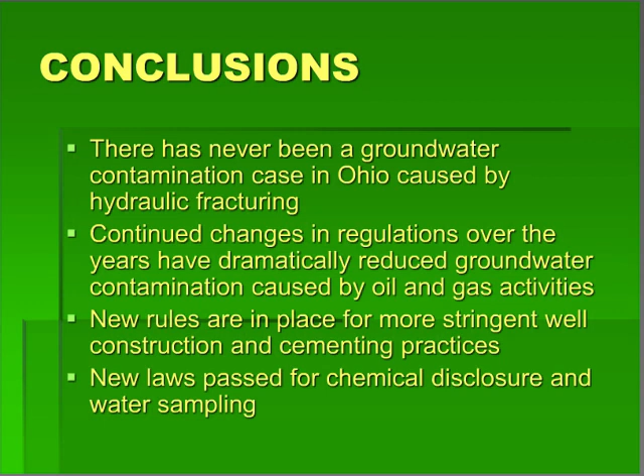So what we are seeing is there are a lot of sources of methane that can be naturally occurring, that can be coming from other sources such as coal mines and coal beds, biogenic sources, natural sources of methane from non-commercial oil and gas zones, and also from legacy oil and gas problems as we've developed oil and gas in the United States since 1859.

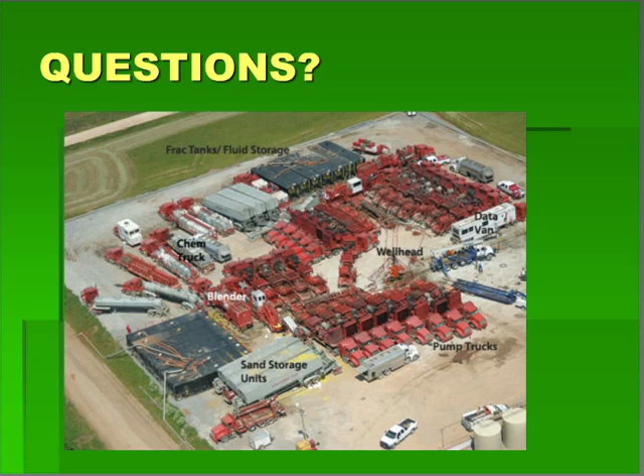Well, thank you, Governor. Tom Tomastik, here's a question that maybe should be addressed by you. If there is a groundwater source near a shale, can you conduct hydraulic fracturing near that site? I can speak from Ohio, from our standpoint. We do allow development of oil and gas well drilling and hydraulic fracturing in close proximity to source water protection areas. What we do require, though, is very stringent additional conditions attached to those permits that will alleviate a lot of the potential for groundwater contamination or surface spills. So we address that by requiring additional conditions to a drilling permit if it's in close proximity to a source water protection area.

Okay, Tom, there's another question regarding flowback fluid. How would you handle flowback fluid treatment or management if the characteristics of the additives are proprietary? We pretty much handle all of the flowback, at least on the unconventional horizontal wells that have these large multi-stage hydraulic frac jobs, by flowing back into tanks, so that nothing on the unconventional shale wells in Ohio is being put into drilling pits or anything like that. So we're in a closed loop system. Our new regulations under Senate Bill 315 do require chemical disclosure. In the event of a spill, we do have the ability to release proprietary data to medical personnel or emergency personnel if they need it.